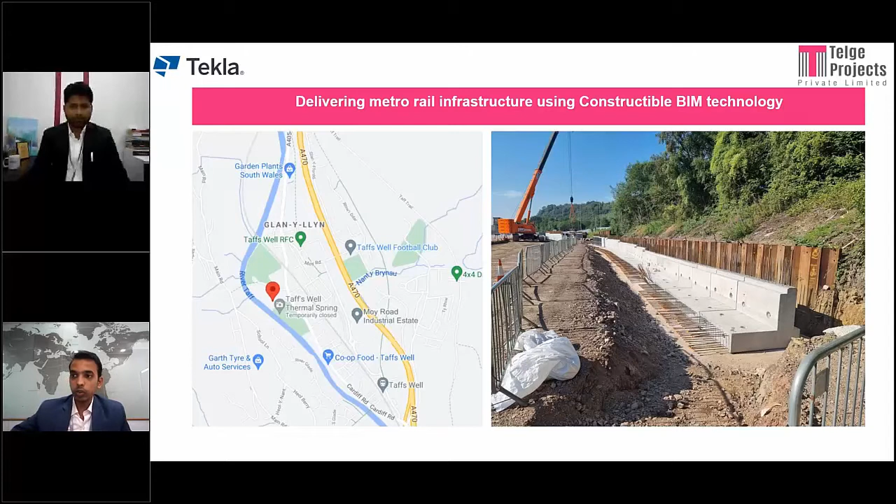Our scope for the project included more than 200 precast retaining walls, several geometric designs, and the reinforcement required for the walls. This is what made the project very unique. Now talking about the unique aspects of the project. The unique aspect of the project was the overall geometry of the structure. The overall geometry was critical as the alignment of the walls was not straight and had angulations at multiple locations. Each retaining wall had male and female joints, both at the base and at the stem slab.

Along with the geometry, the reinforcement design was also very critical as the geometry of the structure was not homogeneous. Speaking of challenges, every wall needed utmost precision to erect on site and thus had to be detailed with an accuracy of almost 99%. Every wall was complex to model and detail, along with the scale of the project being very large. It would have been a very tedious and time-consuming task to draft production and cast unit drawings for each wall with great accuracy and uniformity. This is where Tekla Structures and we come into the picture.

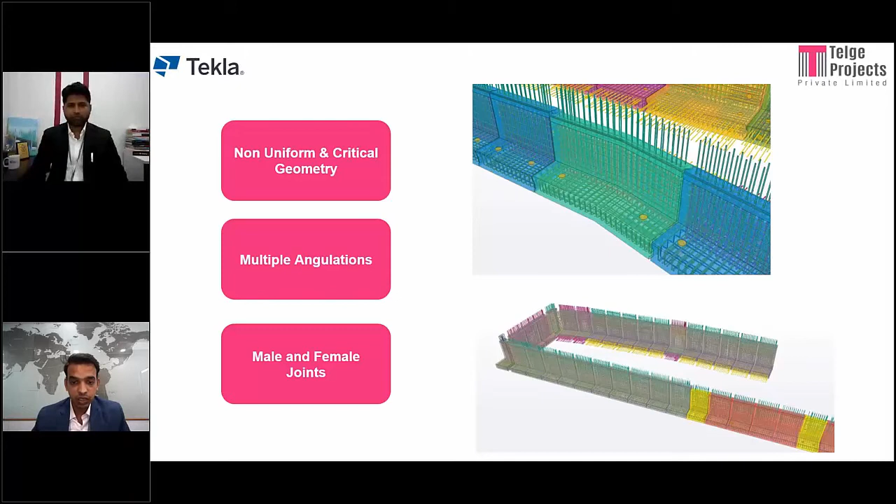We adopted a very different approach within the project, which is the primary reason for choosing Tekla to deliver as per the client's requirement. If we look around the ongoing projects nowadays, we would understand the major requirement of every project is the reduction in time and money. And similar were the requirements of the client for which they opted for Tekla Structures. It was the time restriction and high precision requirements to avoid any wastage in the yard and also on the site. The project had a limited turnaround time and, considering the geometry and erection of walls on site along with some of the in situ structures, reducing the wastage of both concrete and steel was the primary aim of the client, for which they needed automated and accurate reports.

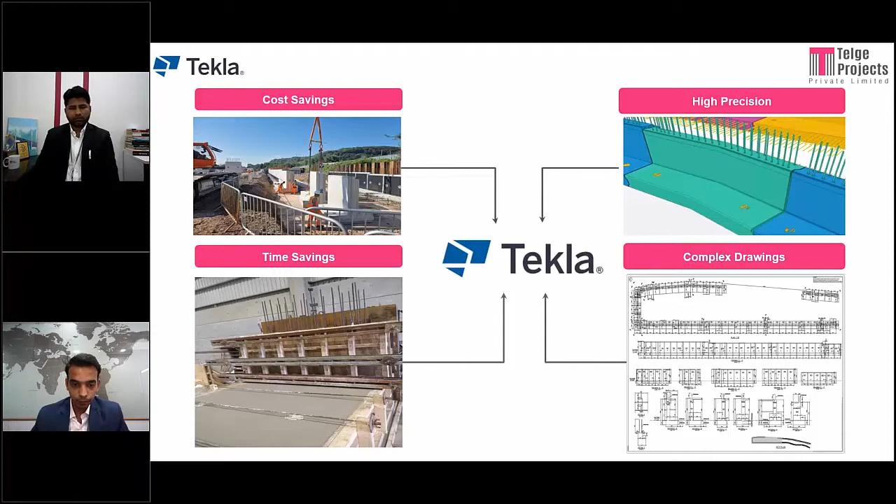Speaking about the benefits of using Tekla and the overall savings in the project. Tekla helped us derive high benefit in terms of overall savings in the project. It offers one of the best solutions to create the 3D BIM model from scratch and extract the fabrication drawings from the 3D BIM model. The major benefit of Tekla for this project was the reduction in time and money in the complete project lifecycle.

For instance, in this project, there were centrally inclined units that were designed with the help of the Tekla Structures profile catalog, more specifically the RC-RW profile. Within just 2 clicks, we were able to model the basic structure of the retaining wall. For the male and female joints, the Tekla Structures part cut command made it very comfortable for the team to provide these complicated joints. For the reinforcement, the Tekla Structures rebar set command made it hassle-free work, and the clash check option made sure that the structure had clean and clash-free reinforcement for each and every unit.

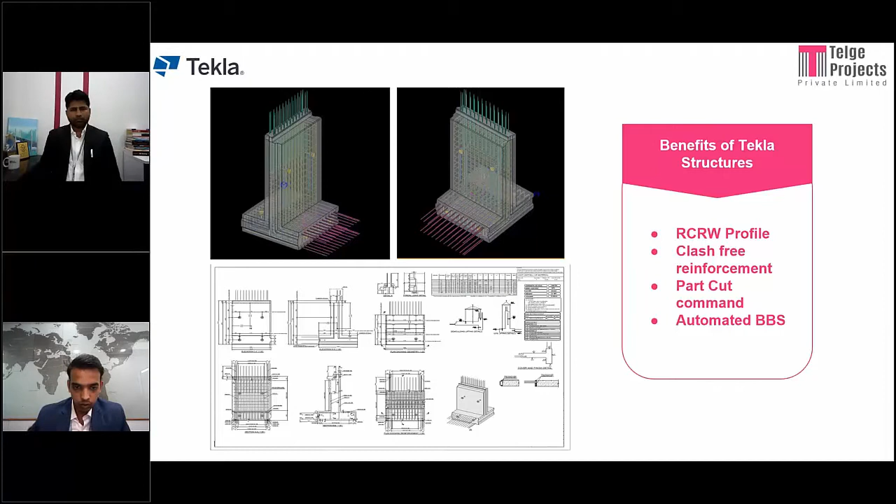Moreover, the automated generated bar bending schedule made it easier to review the details of the reinforcement in the drawings. Now talking about some stats and figures. Around 40% of the time required for the drafting of the walls was reduced due to the cloning command.

Some walls had similar geometry and also very similar reinforcement required, for which the copy to another object command was used, and the custom component command for inserts saved us around 30% of the total time required for modeling. The automated reports and bar bending schedule helped us to save around 35% of material.

I would also like to highlight that for this project, only 2 resources worked and delivered the project within just 45 days, which is one of the huge benefits of using Tekla Structures. And this was the brief introduction of the project, and now I would like to hand it over to Nilesh.

Thank you, Jayesh. So to summarize, the use of Tekla Structures for the precast project has benefited us with time and cost saving, while delivering a complex and unique project which otherwise would have impacted the pockets of the client as well as their time schedules. We are always excited to work on challenging projects of any complexity, which we have been doing and aim to continue in future.

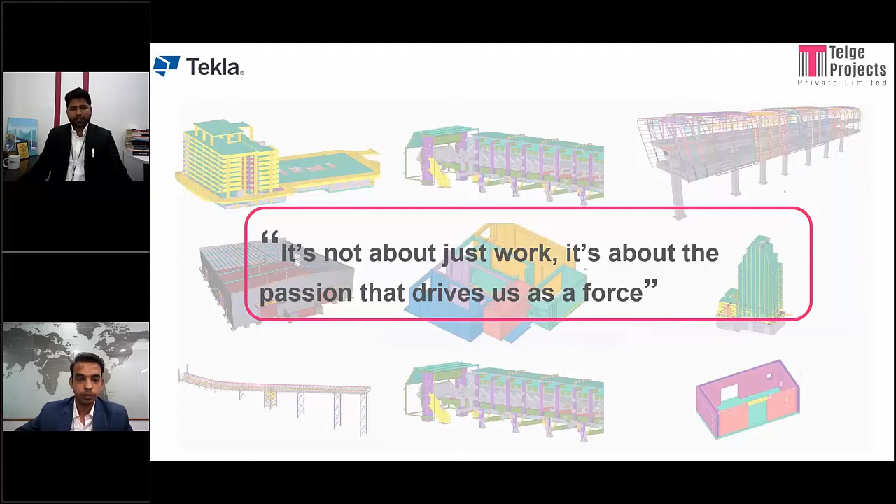That being said, Tekla Structures has been our primary and potential BIM technology partner. We look forward to delivering such amazing projects using the advanced technologies of Tekla and its unique features. To name a few, we are currently working on some prestigious projects with one of our esteemed clients, whom we call our master precaster.

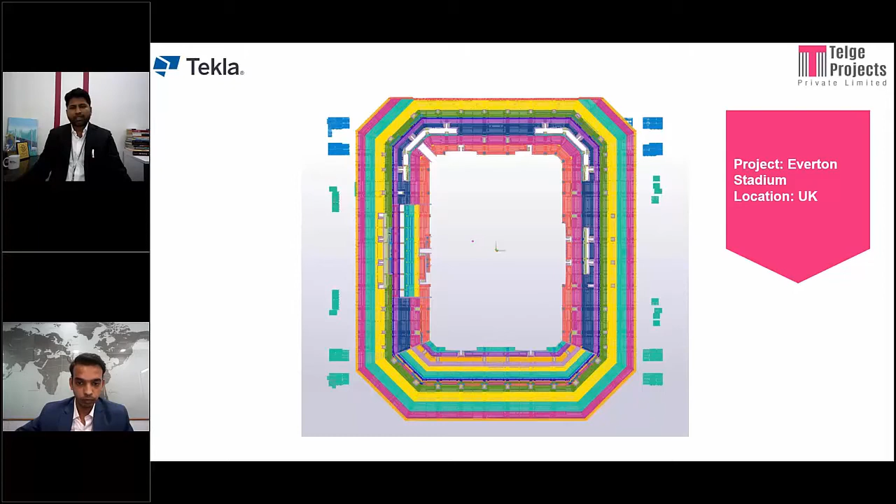The project is Everton Sports Stadium from the UK, and our scope includes different precast elements like stairs, L-shaped walls, and many more. This is a huge opportunity for our organization, and we rely on our most trusted BIM technology partner. To conclude, I would just like to add that it's not just about work, it's about the passion that drives us as a force. Thank you.

Awesome. Thank you, Nilesh. Thank you, Jayesh. That was a very good, quick, within-the-time review of the case study that we recently published. So, for the benefit of the audience, this project, as Jayesh mentioned, took 45 days to deliver with just 2 resources. There's a lot more detailed content available as a published case study on our website.

So, for anybody who needs more details on this project, we'll of course discuss it right now, but a project of this type and all the other projects that Telge Projects has delivered in the recent past, we can discuss for hours and days together. But in the interest of time, this was very concise and very to the point. I'm really surprised to see the accurate savings in terms of facts and figures that have been put forth. Not a lot of people are able to articulate it in that fashion.

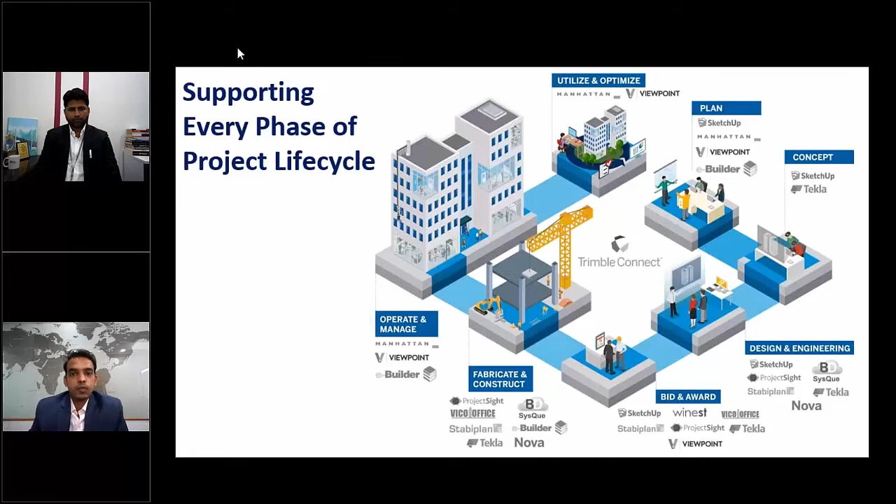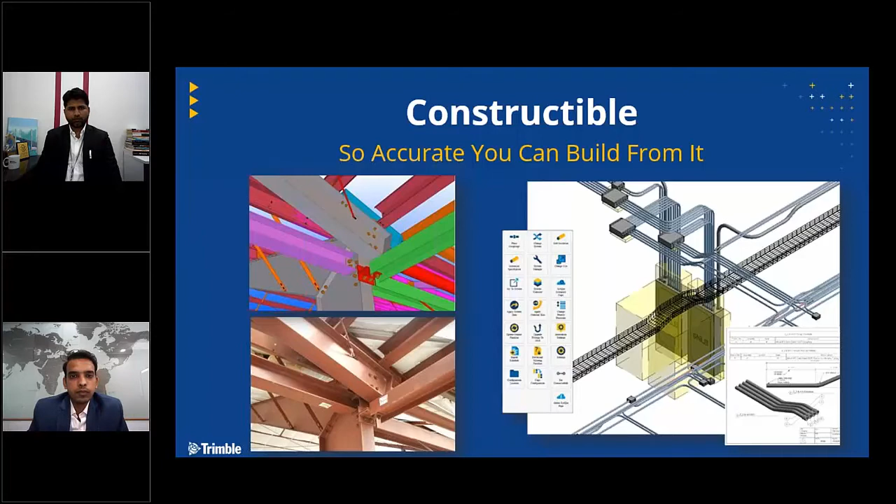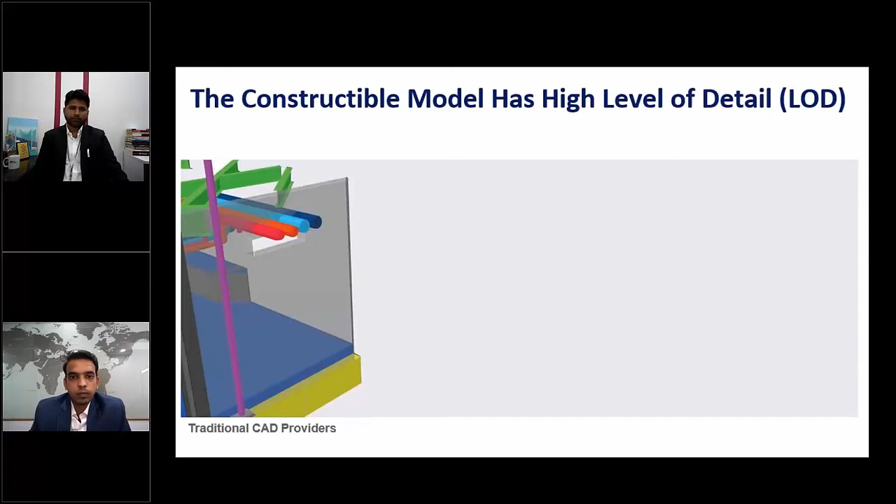Our constructible model and associated workflow are so accurate that you can build from them. In Tekla Structures, we can create a 3D constructible BIM model with high LOD, which is level of detail. Traditional design models cannot provide the level of detail required for constructability. A Tekla model can provide the highest level of detail required to ensure a fully accepted design. Detailers can create and manage the accurate detailed model using parametric intelligent tools in Tekla Structures.

Then drawings, bills of materials, and other documents and data can be generated directly from the model, reducing the need for manual work and preventing human errors. And if there is any revision, any changes in the model are automatically updated in the relevant documents, so it is easier for the detailer to keep all the documents up to date. So this is the basic overview of a constructible model built in Tekla Structures.

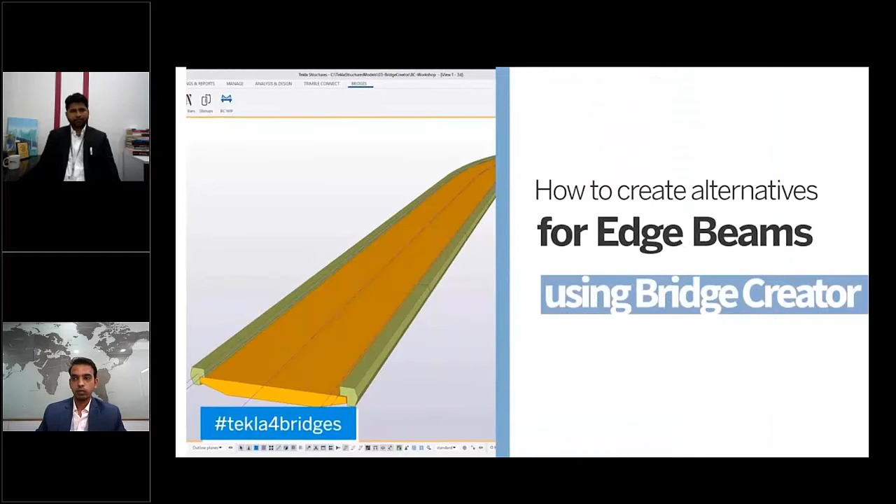So before we move on to see the precast features, I would like to show a small tool for bridges, because it shows the powerful features that we have in Tekla Structures. We have a beautiful tool, the Bridge Creator tool, with which we can create the most complex decks and edge beams with respect to the alignment file.

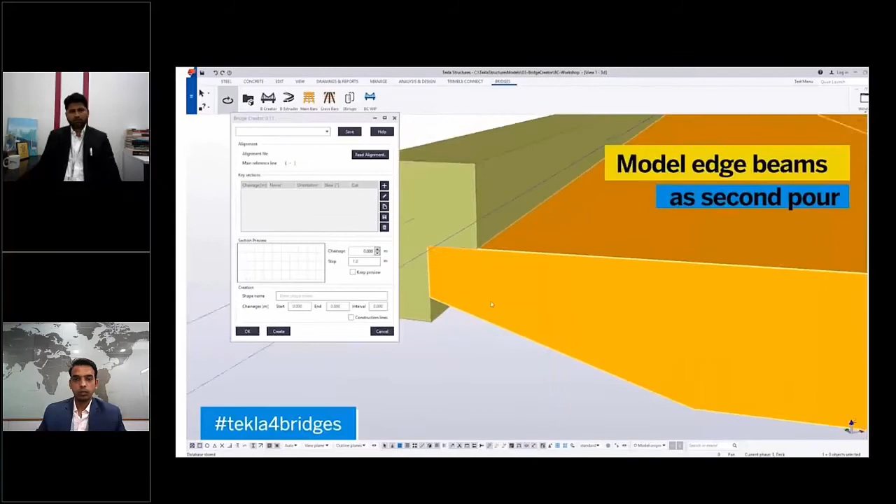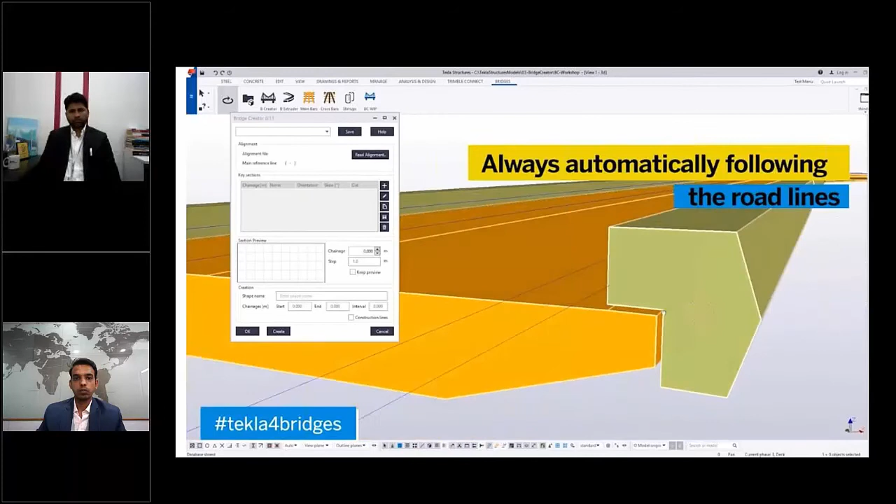The road alignment file can be imported, and we can select the cross sections available in our library, or create our own sketched cross section of a deck or girder, and enter the chainage values, and the bridges will be created along the road alignment. It can also be placed on any polyline. If you model a polyline, the model will track it and create bridges on it easily.

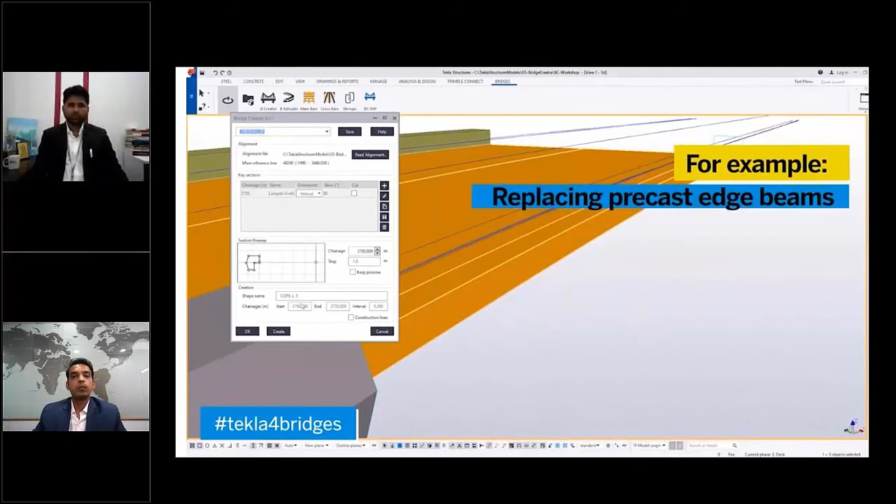These are settings that we can save and reuse for other projects. The only details that change are the alignment file, the cross section, and the chainage values. Those are the three values we enter here for the bridge to be constructed.

We also have the Beam Extruder tool where, if you have X, Y, Z coordinates and profile data in a spreadsheet, we can import it and create the bridge elements automatically. Not only the decks, piers and piles, we can also create miscellaneous items like handrails, parapet walls, and street lights using this tool. All we need to do is select the component, and it will follow the LandXML line and create them with user-defined spacing.

We also have a powerful link with Grasshopper. Grasshopper works with Rhino, and it's like a small script that has a direct link with Tekla Structures. Any modeling command in Tekla Structures is available in Grasshopper through the link. Once we add the script, it can be used in various locations as required, for example modeling a deck, foundations, piles or piers.

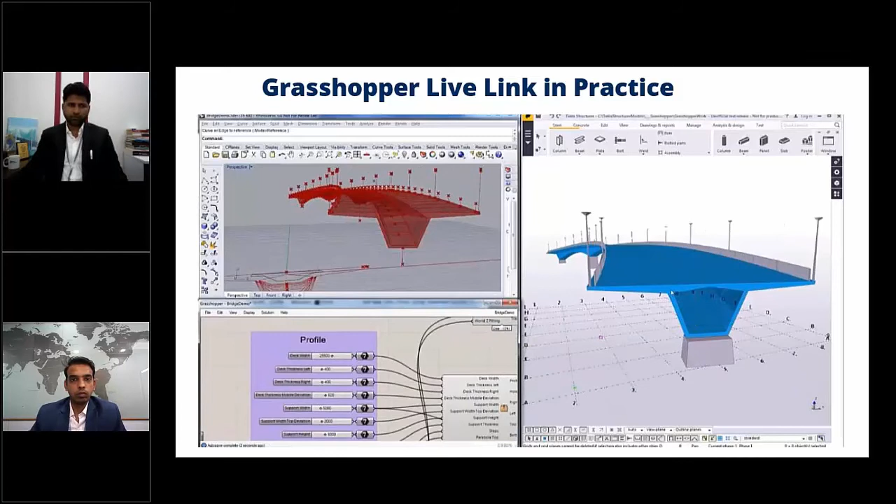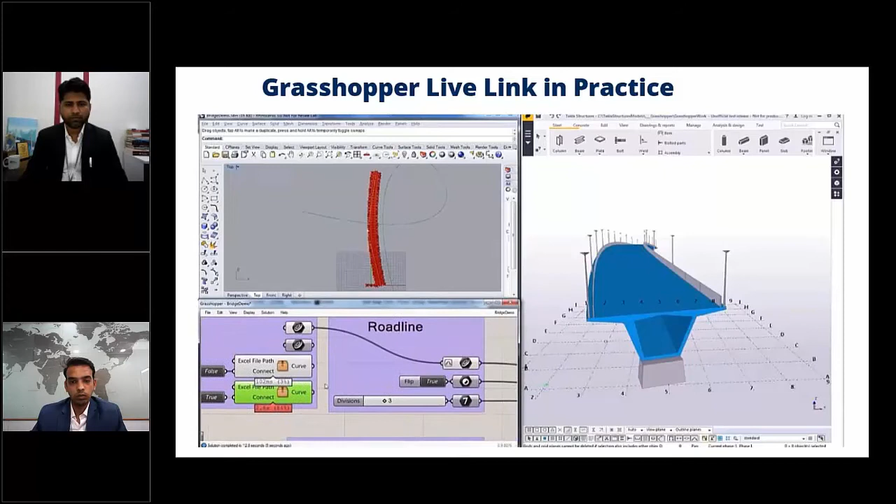It's very simple to modify. Once you modify it in Rhino, the Tekla model instantly gets updated. We can also add an Excel file with the coordinates. We drag the Excel file, and this is the Excel file line. We just need to put the input. Once the base is ready, the model gets automatically adjusted or recreated according to your line, the XML file or the spreadsheet information.

After that, making changes is also much simpler. For example, if you set the division to 7, those 7 divisions are made. These are all handy once the base script is ready. And we have a free link available with the trial license that you can try in Tekla Warehouse.

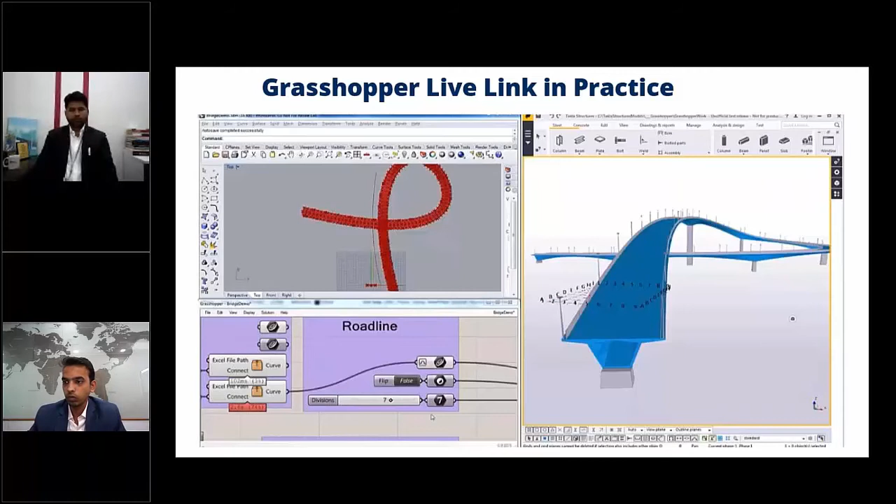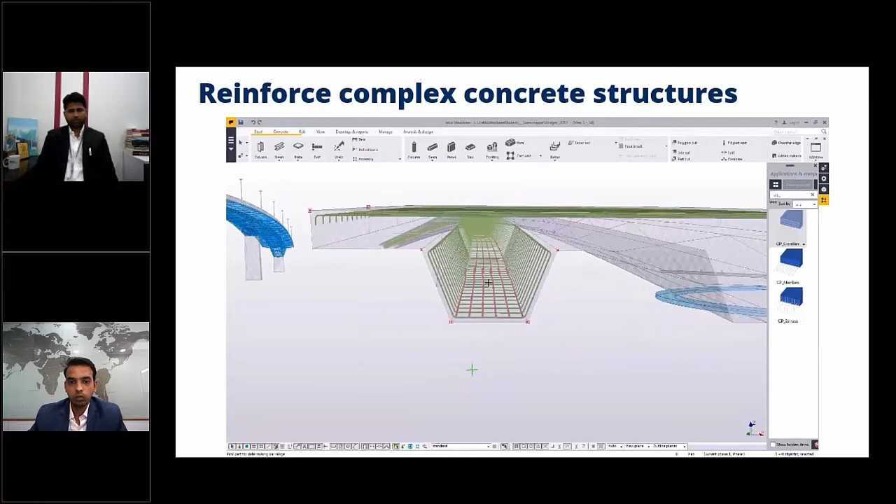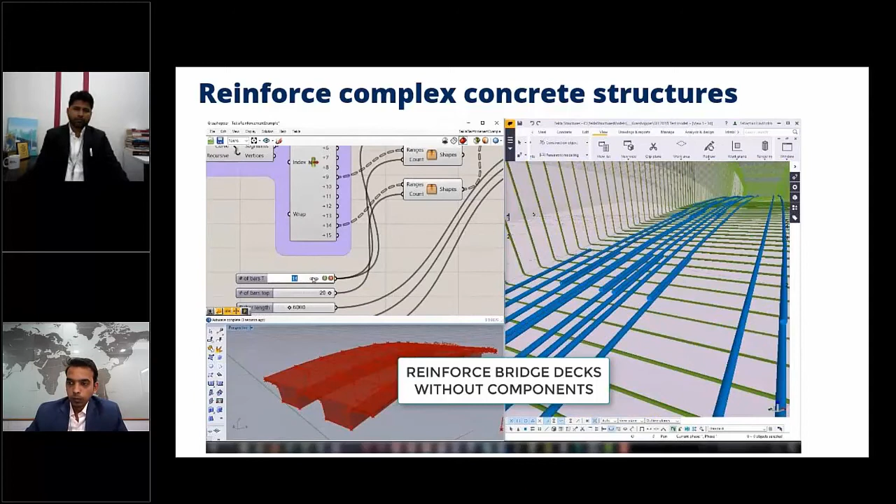So this is another tool, and we can also do the reinforcement with the Grasshopper link. The scripts for reinforcement, the tools, the buttons are available ready-made in Grasshopper link. Once you download the Grasshopper link from Tekla Warehouse, all the command buttons are available on top, and you can drag and drop and create the script.

And all these reinforcements are adaptive to the changes in the geometry, because in this script we are just adding the reinforcement with respect to the cross section. You can see here this is a complex shape, and here we are reading the cross section. With respect to the cross section, the reinforcement will be given. We just need to select the diameter and the spacing.

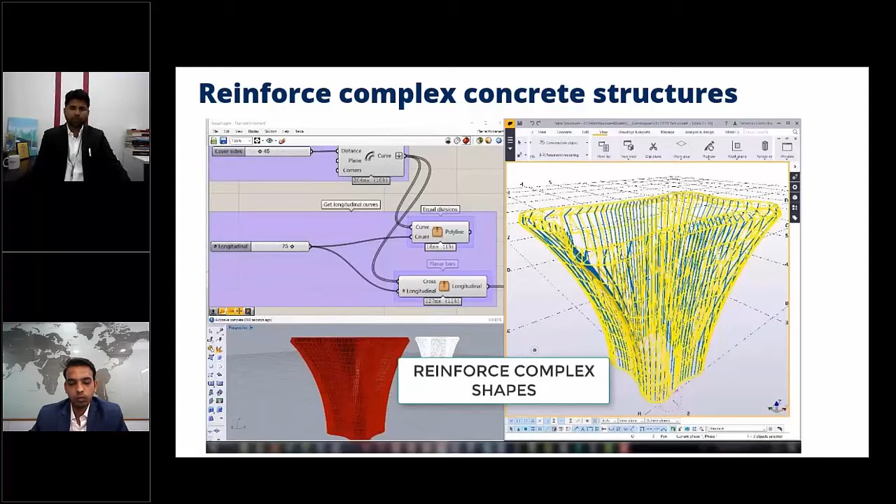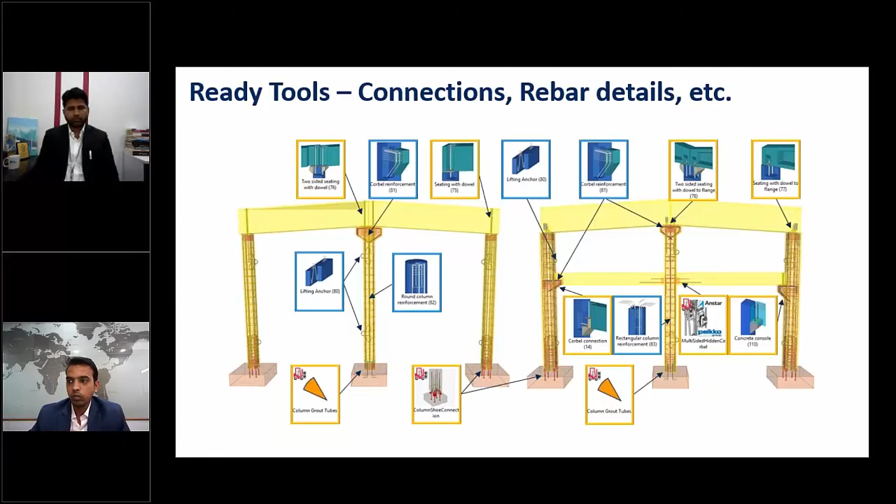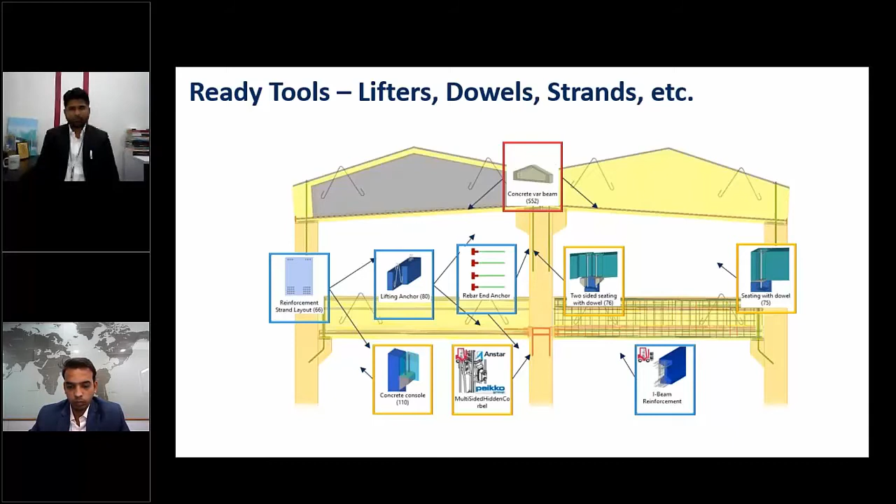Coming to precast, we have a lot of tools available for automatic connections and rebar details: rectangular column reinforcement, circular column reinforcement, different types of corbels and corbel reinforcement, grouting connections, etc. Here is an example of lifters, dowels, strands, and I-beam reinforcements. These are all automatic components that come with the software installation. Apart from this, you can download various tools and automated connections from Tekla Warehouse as per your needs.

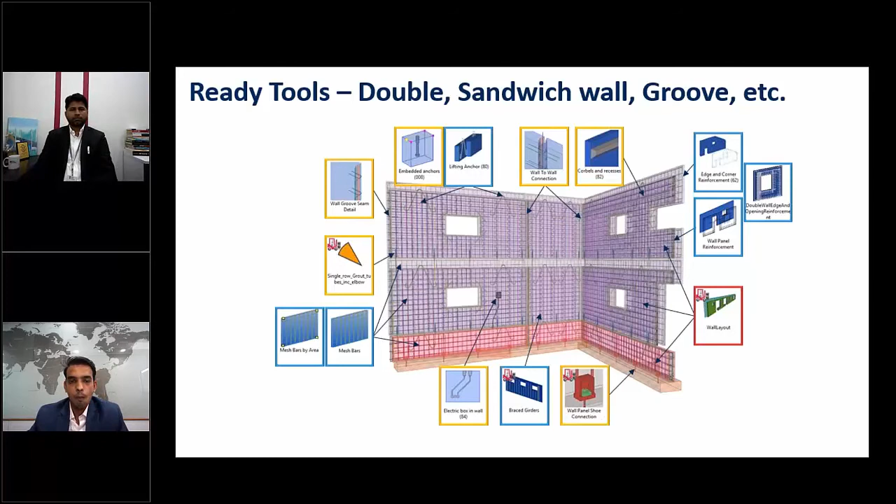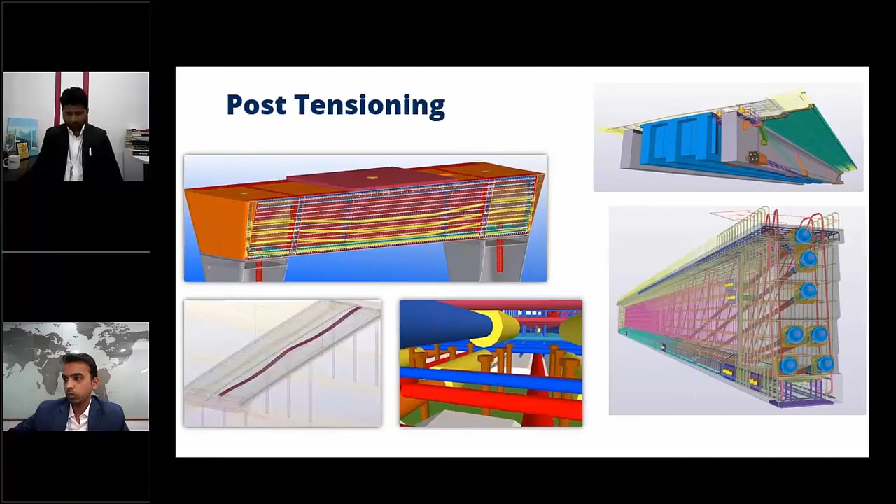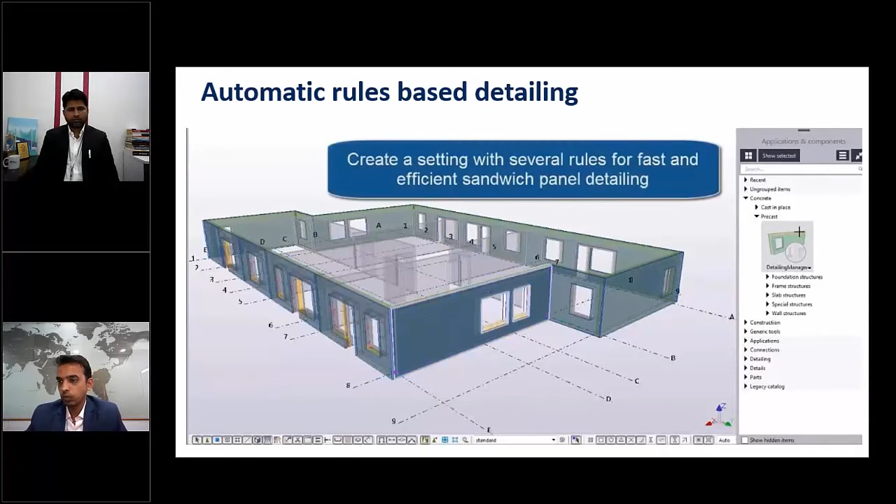All these components are intelligent. For example, when we increase the wall size or wall weight, the number of lifters will automatically increase based on the conditions. When we add an opening, the weight of the wall is reduced and the lifting diameter is automatically reduced, as you see. So all the components we have are intelligent and adaptive to the changes, so revision is much easier.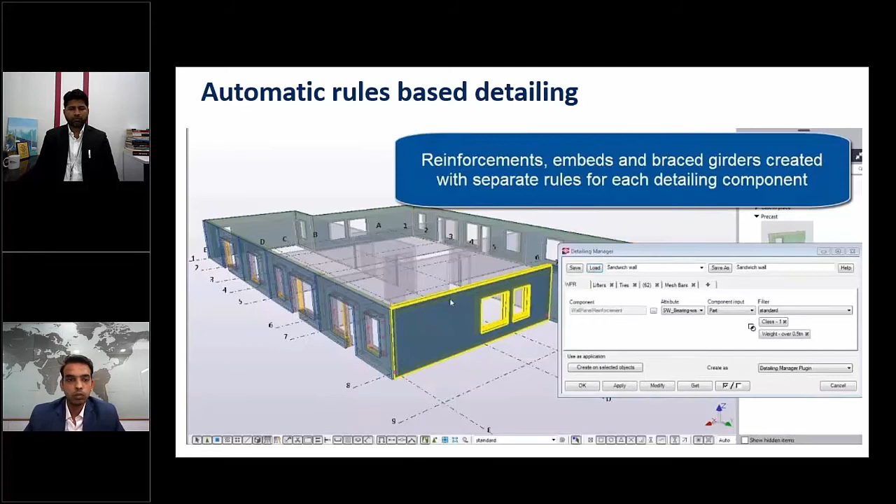Also for precast, we have the batch editing tool where similar assemblies or similar cast units can be modified on a mass basis. Once you modify any one particular wall element, we can apply those changes to all similar elements automatically by selecting them from the list.

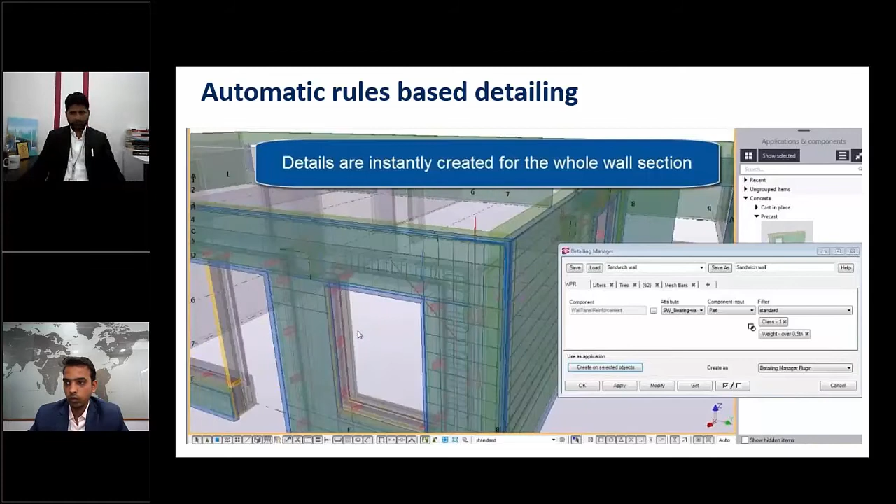See here, at the click of a button, how many details are placed inside. Not only the reinforcement on each face, but the additional reinforcement and lifting bars are all placed. As I said, these are all adaptive to the changes. Once we add a new opening or adjust the opening, your reinforcement detail is going to get updated.

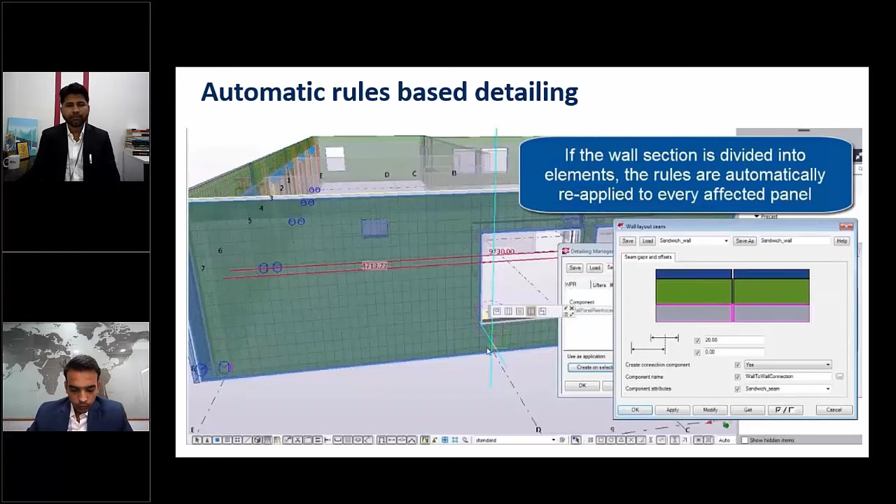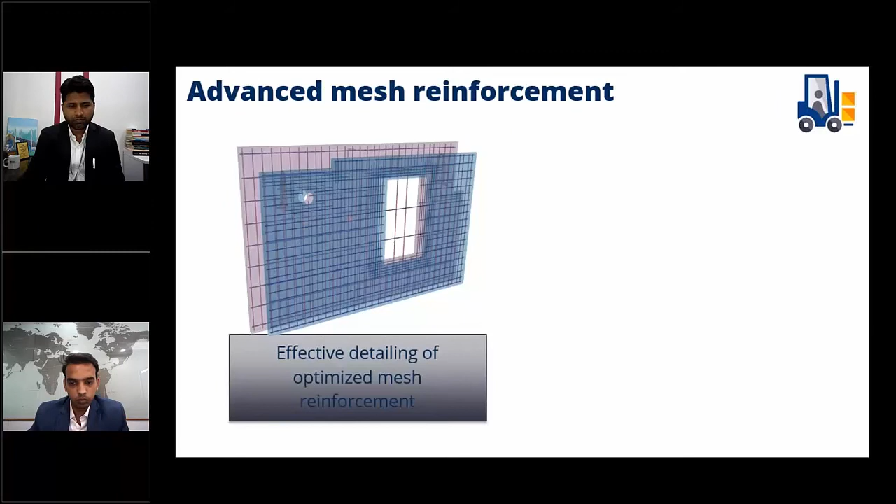We have many tools for floors, sandwich walls, hollow core slabs, and spacer tools for different purposes: for raft foundations, thermal pins, sandwich diagonals, and frames. These are a lot of automated tools that we have in Tekla Warehouse. For the benefit of time, I'll just show you a couple more tools, and then I can move ahead with our presentation.

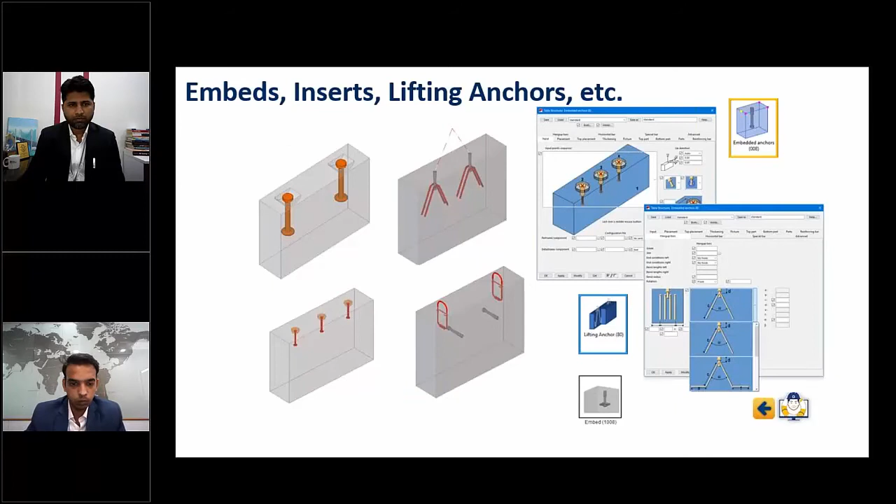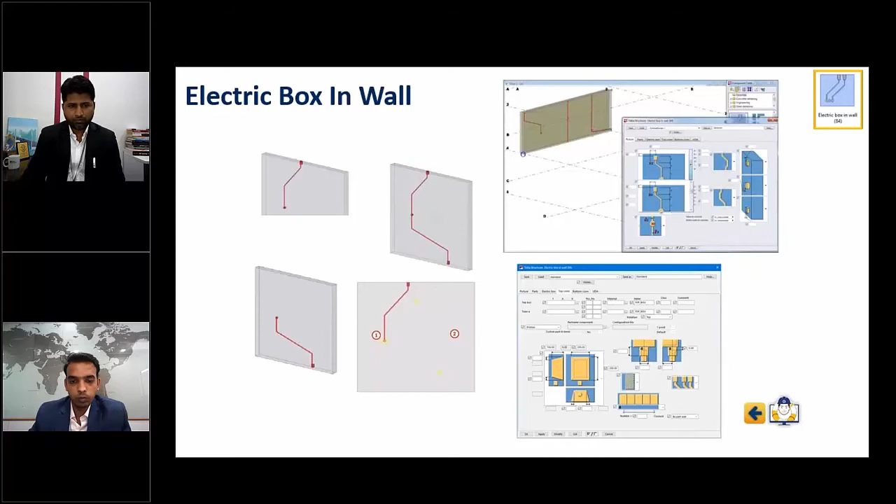These are some examples of embeds, inserts, lifting anchors. We can place all these intelligently inside the wall elements or slab elements, and we can generate the drawings from them.

And yes, we have automated clash check. We can detect anything inside Tekla Structures: reference model versus parts, part versus part clashes, part versus reference object clashes, component versus component, rebar versus precast, and other precast miscellaneous items like embeds. We can run the clash check automatically and detect it, the checker can assign it to the detailer, and we can keep track of the history, like which clashes have been removed.

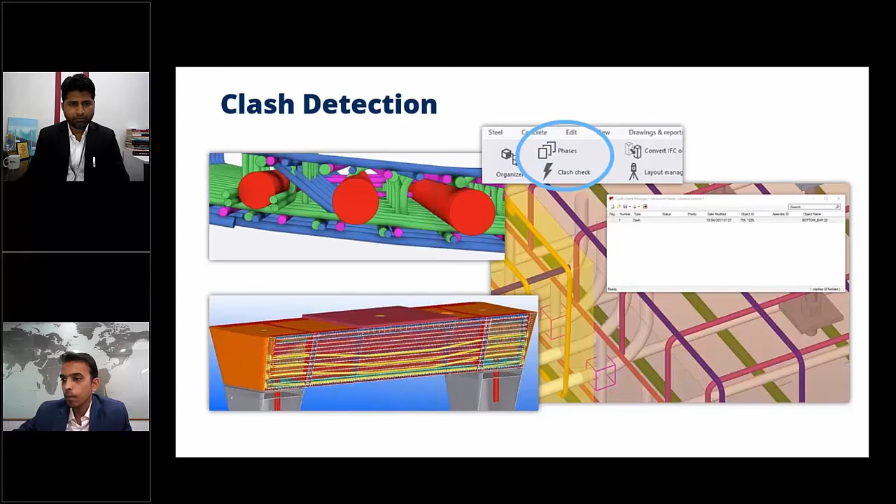Someone asked about the cost quantity calculation. The design to cost tool makes value engineering significantly faster to find the most economical solution for your precast project, working directly in the Tekla modeling environment. We can instantly check the cost and compare it while we change the element geometry or hollow core slab direction. We can instantly know the cost for tendering or bidding purposes.

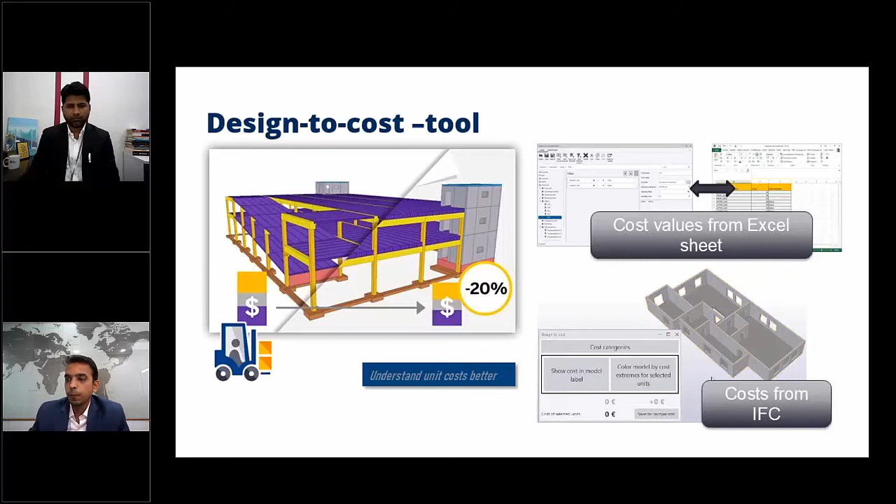Once you model the preliminary objects, at any point of time I can detect the cost. We have a predefined cost schedule for each and every object, which we can modify, and we can calculate the cost at any point of time. Obviously we can take the material takeoff also, and reports for reinforcement, different types of bar bending schedules with pull-out pictures, formwork details, concrete quantities, cladding surface finishes, etc.

And from 2D to 5D and 4D estimation, everything can be done in Tekla Structures. Here is how it can be done. Some examples of bar bending schedule and concrete takeoff. We can create for the whole project or for the selected objects or for a particular floor at any given time. I can quickly select and I can create the quantity takeoffs.

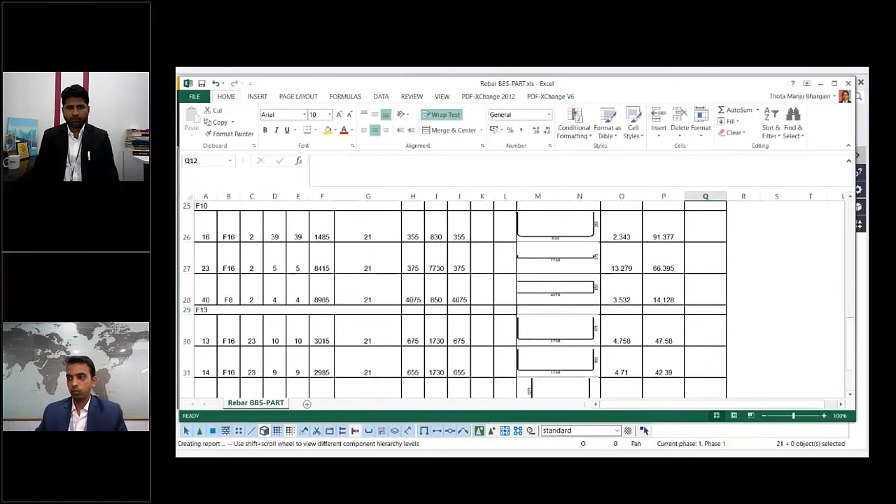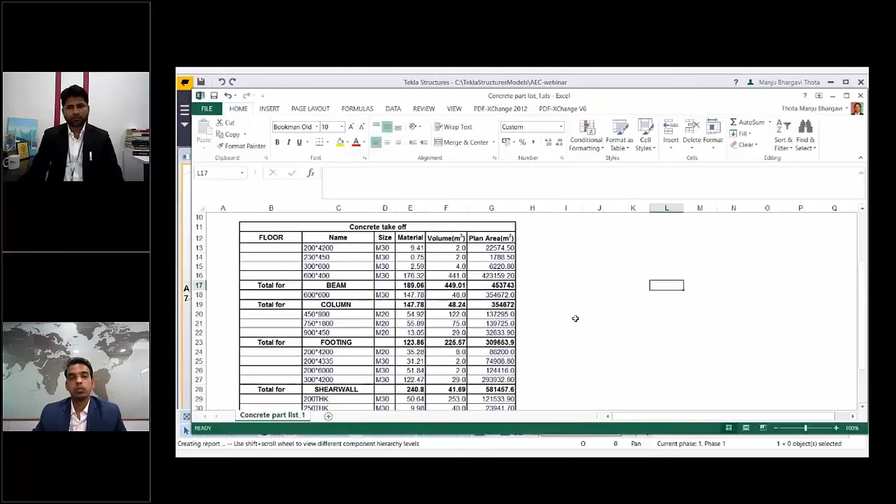Here is a concrete takeoff for each element wise, and these are all customizable for your own standards. The content, the logos, the font, everything can be customizable to your own requirement as per your client needs. Here is an excavation report in cubic meters for concrete below ground level and concrete above ground level for different elements.

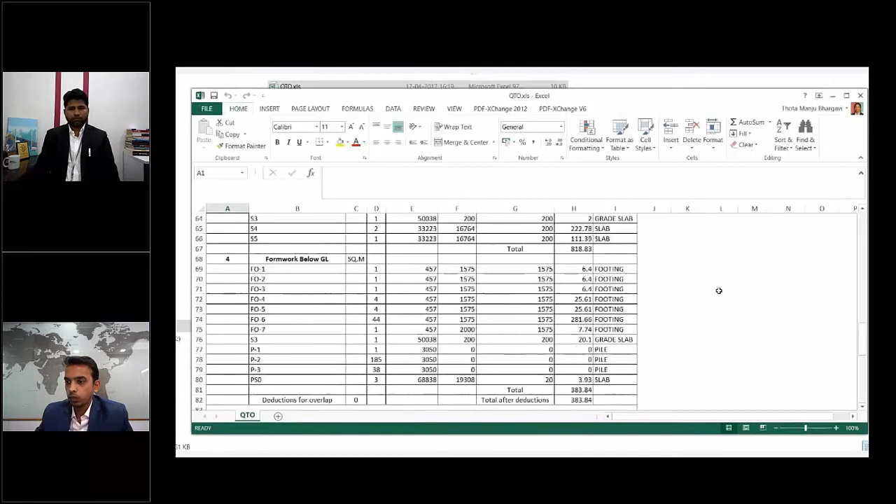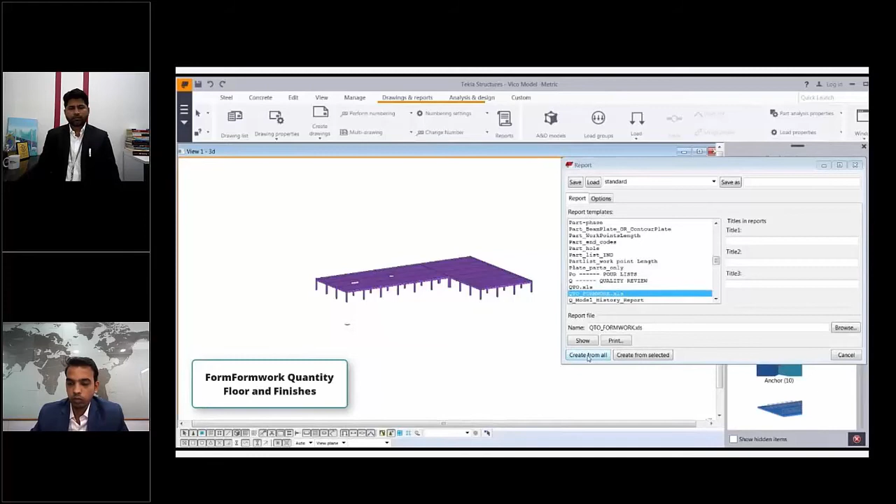So once the model is ready, we can quickly calculate the formwork quantity, also floors and finishes data we can create. So we have our automatic tools for calculating the formwork quantities without any overlap. When the column beam junction is there, it will not calculate. It is intelligent enough to avoid those overlapping portions while calculating the formwork quantities.

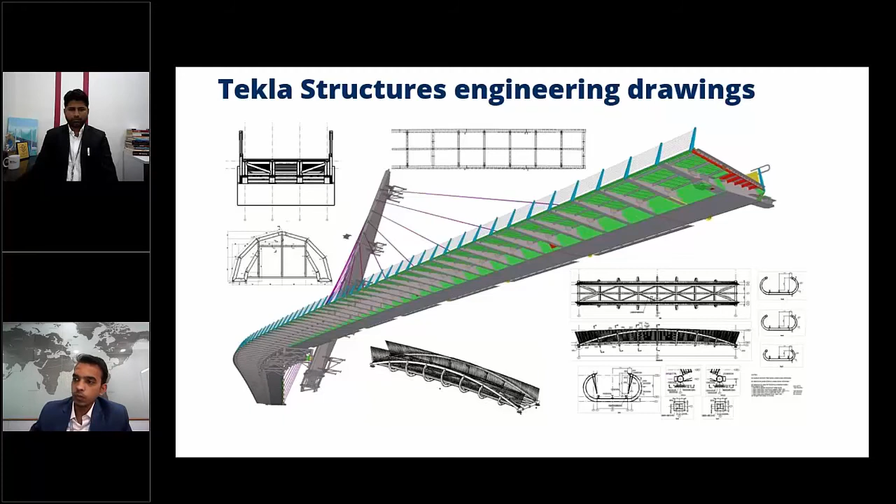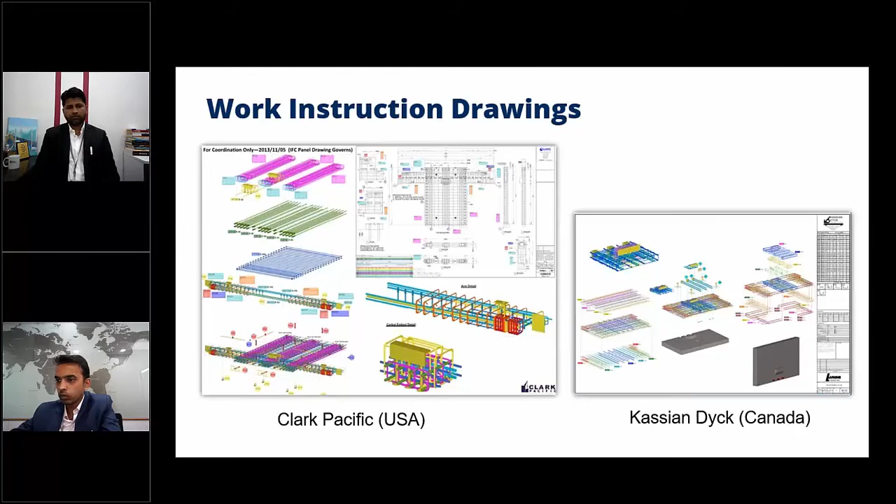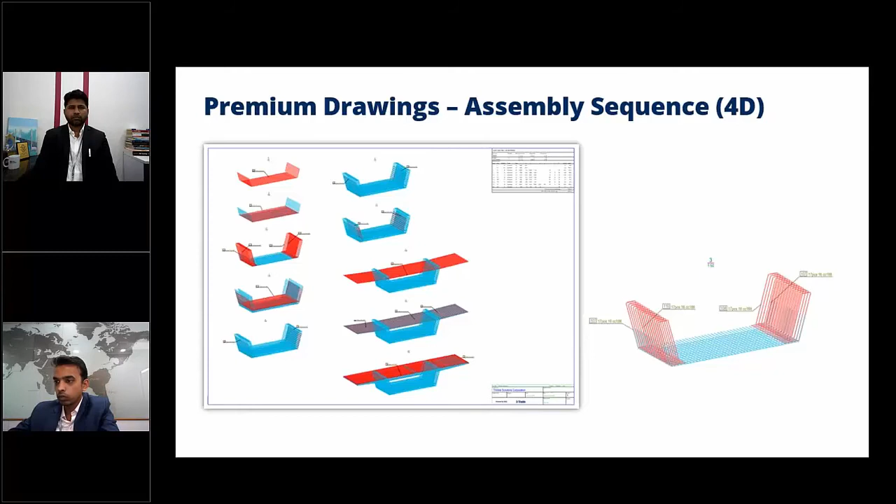So some sample output drawings generated from Tekla Structures: engineering drawings for steel bridges and concrete bridges, and the workshop drawing and work instruction drawing. It's from our clients, Clark Pacific and Kassian Dyck. And also we have the assembly sequence drawing for reinforcement, which reinforcement to be assembled first and second, with different color coding. These drawings can be created accordingly. The 4D sequential drawings.

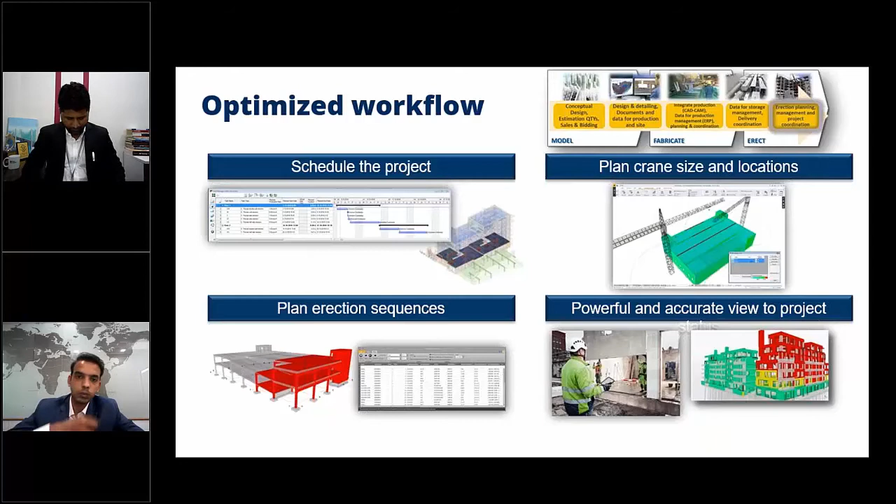And also we have tools for optimized workflow. We can schedule the project. We have a task manager to calculate the task accurately from the 3D data model that we have created. And we can also plan our erection sequence. We can plan the crane size and location. And also we can have the powerful and accurate view of project status. 4D scheduling. According to the timeline, we can check the status of the project with different color coding at any given point of time. So what's happening at the site, we can see it virtually.

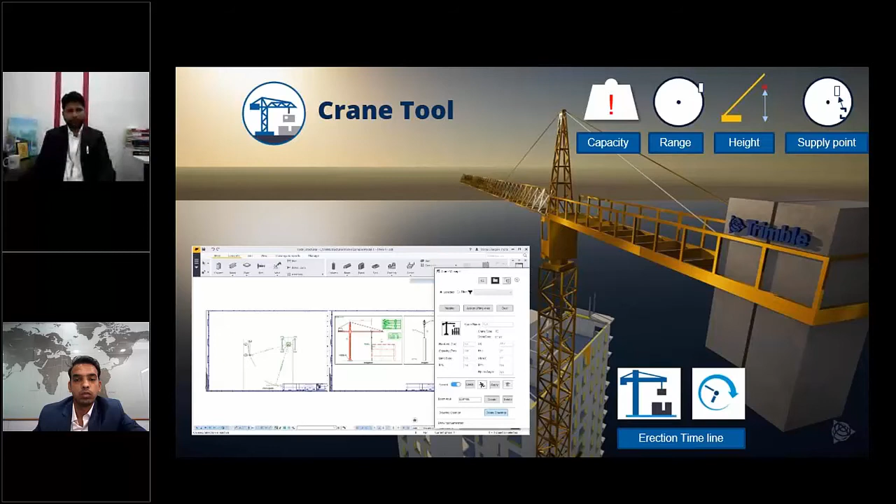This crane tool, like I said, helps you to optimize the needed crane size and locations, or create your prefabricated design in a way that it's suitable for the selected cranes. This tool has many different lifting checks, support for customized cranes, lift simulation is also available, erection time calculation embedded, and also the drawings. In the end, I can give a proper and accurate drawing where to place the crane for which element to lift. So from start to end, we can streamline the process of erection with accuracy, and we can avoid a lot of inconsistencies or uncertainties in the site.

And accurate fabrication data is absolutely crucial. So supporting the digital fabrication with different solutions that we have, Unitechnik, Progress XML, Elematic, these are all the NC softwares. From the Tekla model, we can export our model data to the NC machine for automatic cutting and bending, and for automatic process for precast elements and reinforcements.

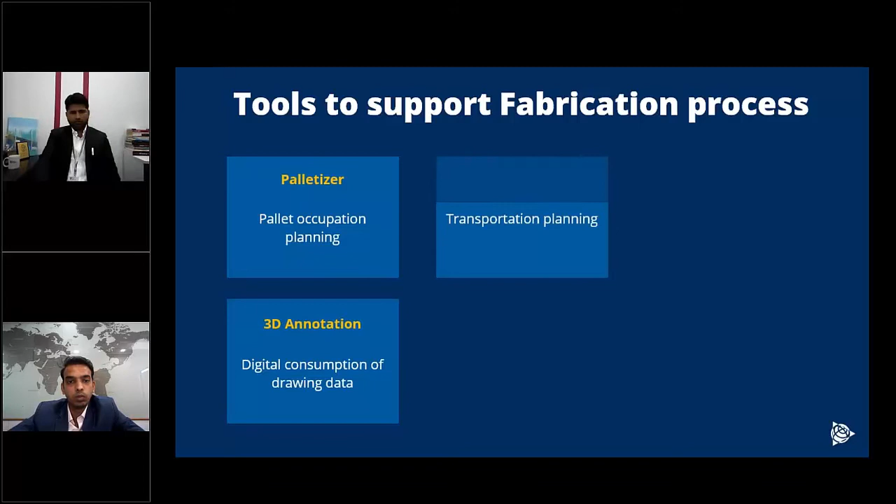And we have also tools that could support you for transportation and erection. Palletizer to optimize your pallet size, pallet placings. From the 3D model, I can plan the pallets, what are the slabs or the wall panels that I need to place in a pallet in the most utilized manner. And 3D annotations are available that I will show you in coming slides.

Stacker for transporting the elements in the truck. I can stack it in a 3D way. I can just move it with 3D animation. I can just drag and drop the different wall panels inside the truck, and I can see which is fitting more, which is more feasible, which is more efficient for me to transport in a single load.

And rebar nesting for optimized cutting. We can do the nesting, and we can do the optimization of reinforcement using this rebar nesting tool. And a scaffolding tool is available. We can build scaffolding very quickly using the scaffolding tool. And much more are available.

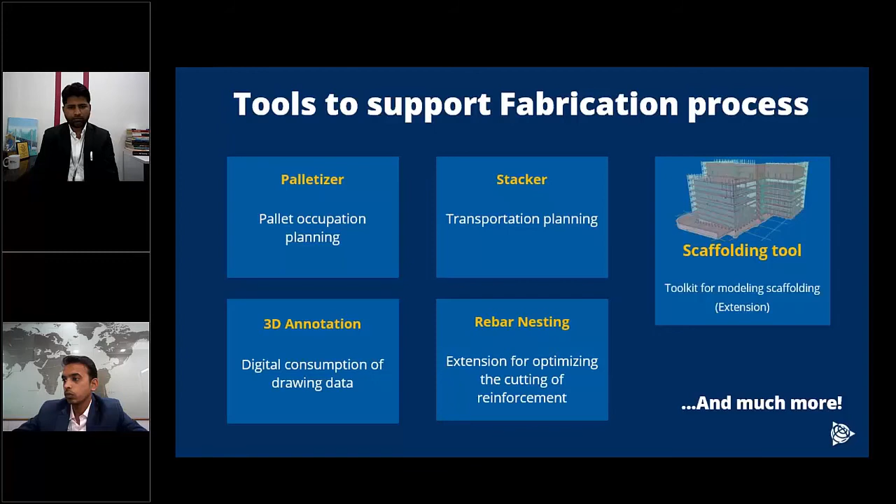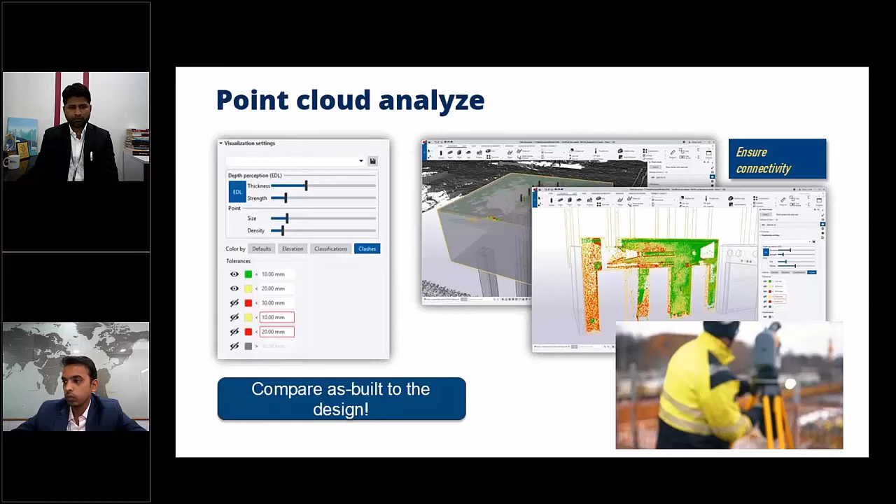And coming to the last portion of our session, let's discuss some more added features or value addition to our software. We can run the point cloud analysis. We can compare as-built to the design. We have the Trimble 3D laser scanning machine, which will scan your model and we can get it superimposed on the Tekla model.

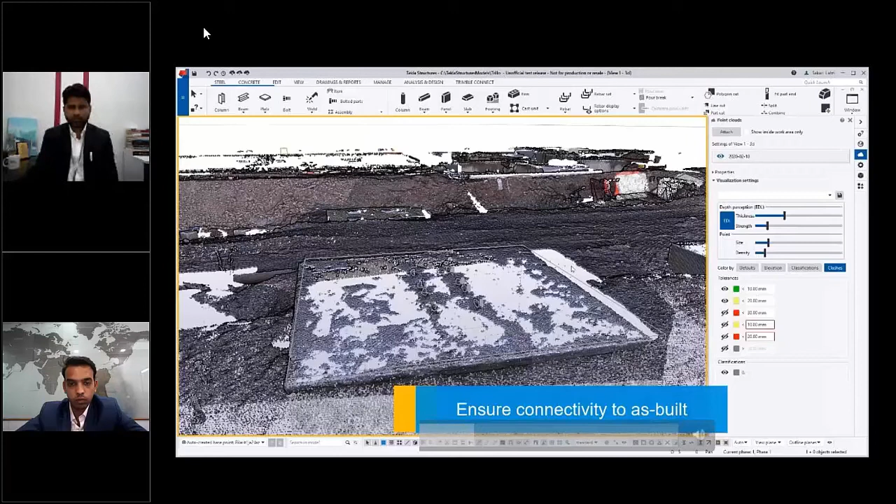And we can ensure better connectivity between the model and the as-built data. Mr. Jayes has said correctly, the importance of as-built data, how it is crucial to ensure the accuracy of the project, and you can do it automatically in Tekla Structures. Once you scan it, I can superimpose and we can ensure the connectivity to the as-built.

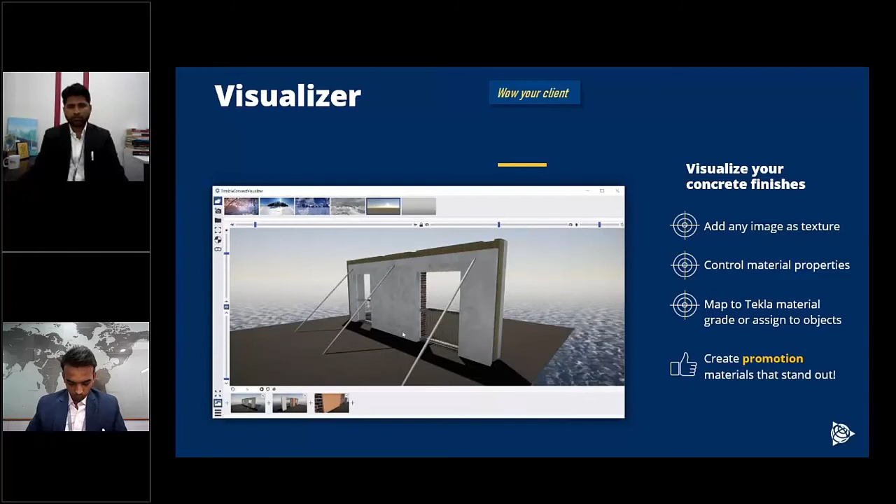And with Trimble Connect Visualizer, you can create a photorealistic rendering from Tekla Structures models. Now it has a feature for material definition where you can create custom texture from image files and control the material properties. It can be mapped easily to Tekla material grade. So now we can create a powerful promotion material about your precast project with the concrete finishes that you're able to manufacture really. That is much more powerful to wow your client.

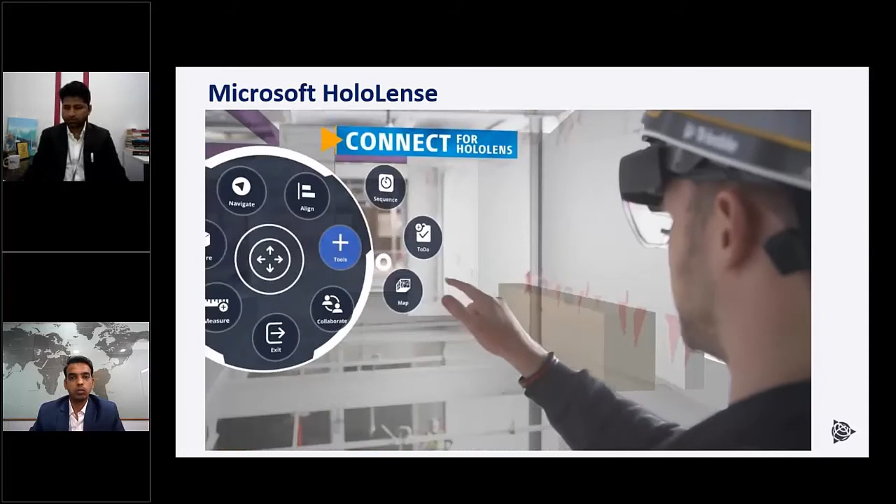And also it has a new virtual reality mode. When we talk about virtual reality, we have a tool called Microsoft HoloLens. This is a wearable and self-contained computer, the XR10, and it contains Windows 10 inside. So then imagine how powerful it is. Its sensors understand the environment and support interaction between the digital content, that is the model, and the physical environment, that is the site.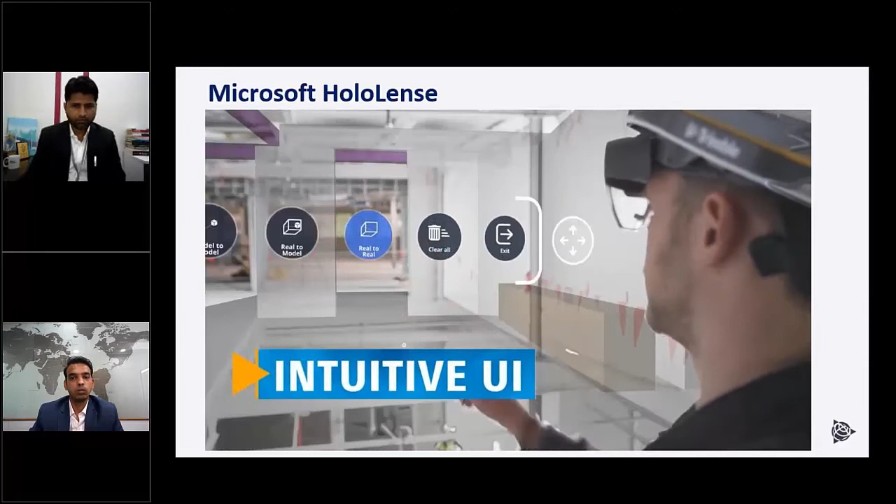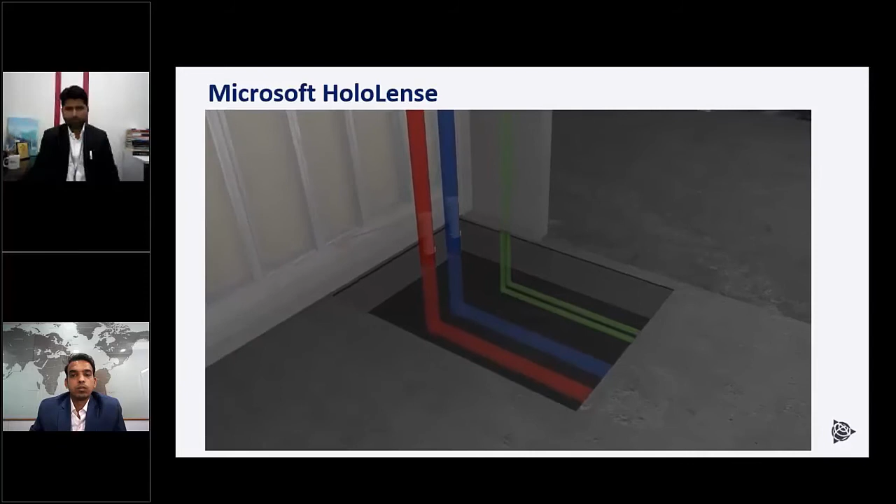You can place the model on the site actually, and then you can see what is happening and where the issue is. The see-through display is there to visualize the content, and I can still be aware of the surroundings. There are a lot of safety features added to this, even the noise cancellation. We should be aware of what is happening in the site, right? You cannot avoid the environment in the site because it should be taken into account for the safety measures in the site. So all those things are taken into account with the norms, government guidelines, and we have this XR10.

From Trimble Connect Visualizer, I can bring the model and I can superimpose it on the actual site, and I can see the model in virtual reality with the actual size and the information inside it.

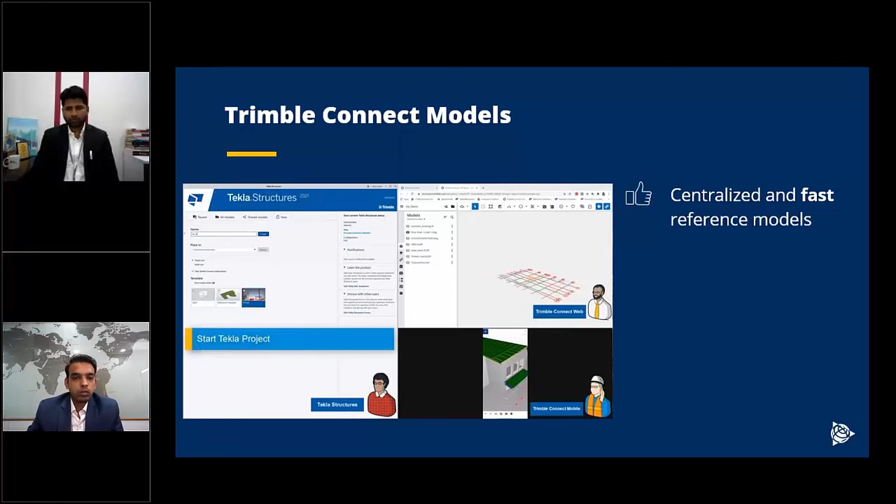And we have Trimble Connect to support the constructible process. Data must be connected for activities such as procurement, estimating, machine automation, and asset performance. Using Trimble Connect to host the project models gives you a great benefit to your projects. Models in Trimble Connect are a centralized and fast way of handling models. A Tekla model can be easily shared to Trimble Connect as a .tekla format, and Trimble Connect stores a history of models. We can bring in architectural model, structural model, MEP model. So it's very powerful to keep track of the changes happening in the project at any given point of time. Any different stakeholder can know what is happening in my project.

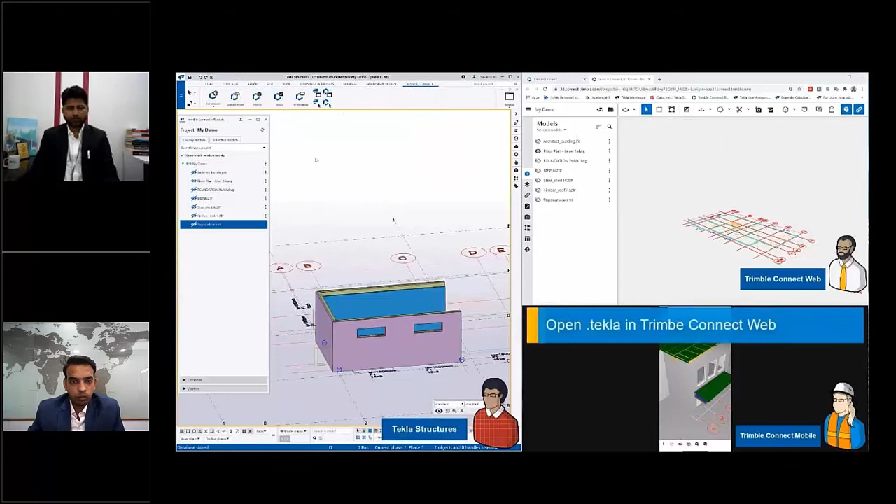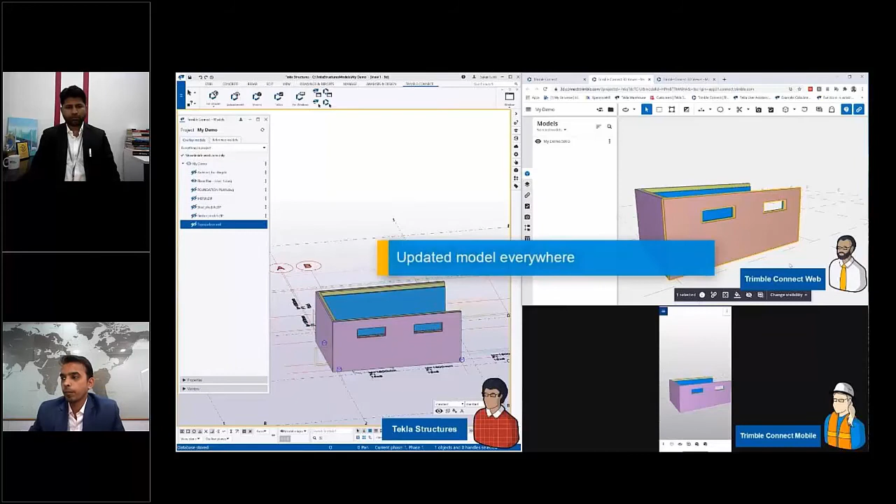So here is an example. We're just modeling some wall panels using the DWG file inside it, tracing on top of it for quickly constructing it, and pushing the model to Trimble Connect. On the right hand side, what you see is the Trimble Connect web app at the top and the mobile app at the bottom. In all these locations, different stakeholders who do not have a Tekla license can access the model. He can view it. He can do the markup. He can run the clash check. He can superimpose the architectural model or MEP model in the mobile or in the browser, or using the desktop app. He can have the entire detail. He knows what is happening. He can assign some tasks to a particular group of the team, and he can basically manage the entire project in his hand.

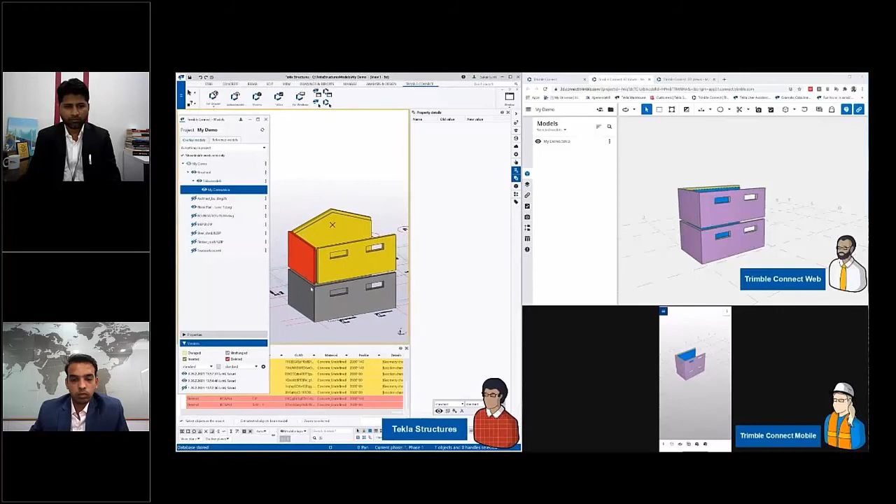I can also compare different versions: yesterday how my model was, today how it is, and also the 4D scheduling. These are the different changes. Some element has been modified. He will get the push notification instantly if anything changes. He can open the app and he can view the history, what is happening, and he can manage the team.

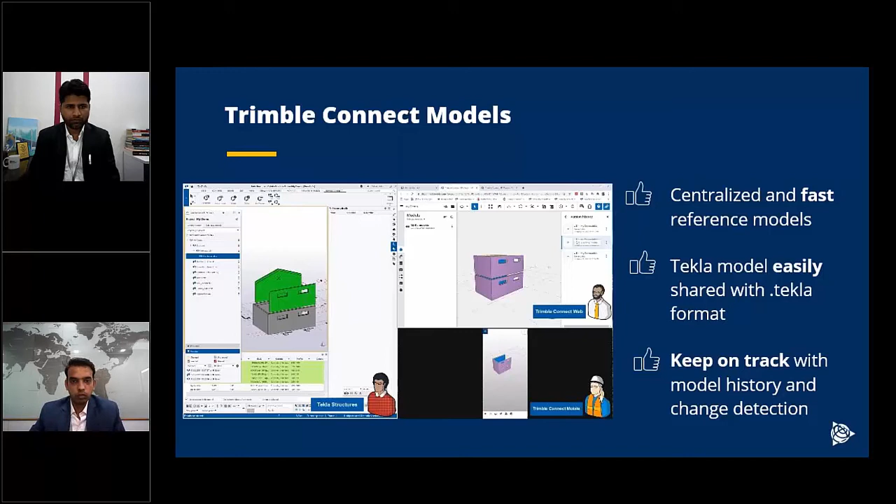As I said, we can do the clash checks. We can also attach the documents. The 2D drawings, PDF file or DWG file, can be attached to it. And added to it, we are introducing a new latest feature in Trimble Connect that we can do drafting work also. A proper drafting feature is also available. So that comes with the disclaimer. We will let you know once it is released.

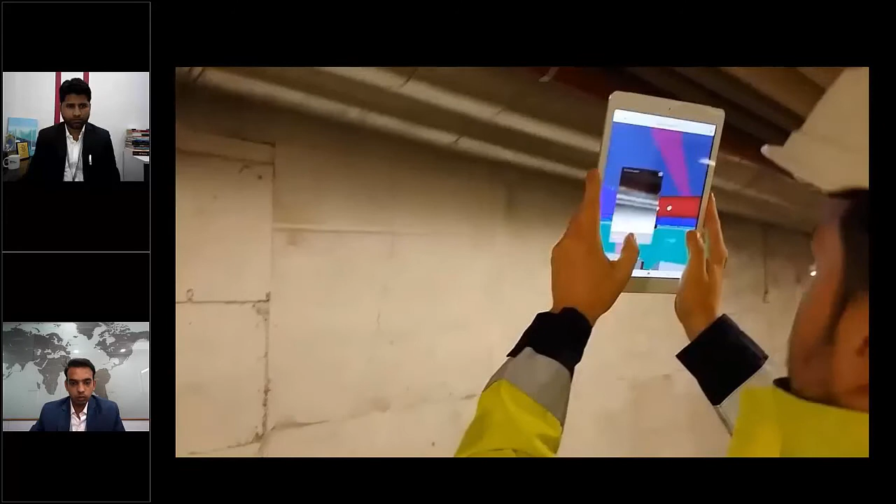All right. So again, this is the one. And one more example here, the mobility. A person in the site opens Trimble Connect on his tab and he attaches a particular issue that he is facing in the site. He can attach it to the particular object, a Tekla column or Tekla beam, and the detailer will get a push notification and he can see what is happening in the site. All these things are digitally transferred, and the RFIs, everything can be stored and the history can be tracked at any given time.

And while drawing can contain the most complete information, it always requires the right understanding, right? So we have this feature introduced in Trimble Connect where we can superimpose the drawing and merge it with the 3D object. Combining 2D and 3D will result in easier, faster, and better understanding overall, right? And do not forget the opportunity to work more efficiently.

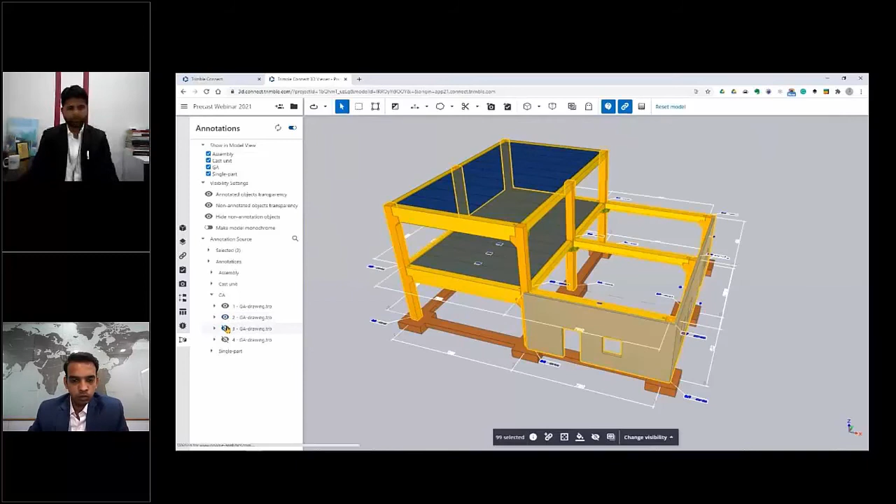The 3D model speaks more than 1,000 words. It makes it easier to understand complex circumstances. The 2D, again, gives more insight for checking and reduces a lot of time to check the models easily. It's GA drawings which are superimposed, and detailed annotations can also be placed for reinforcement details.

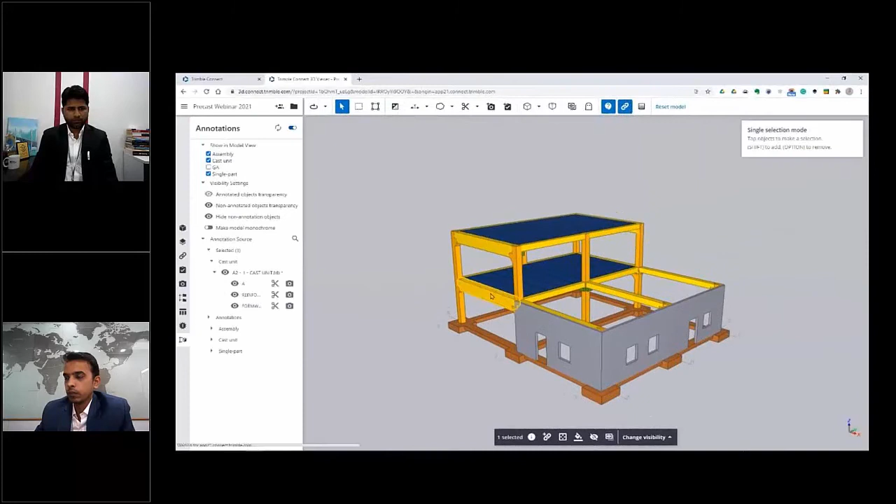So if you see here, just imagine a site engineer carrying this in his hand while the execution is going on. How powerful it will be, how accurately we can build the model. This is the power of the constructible model in Tekla Structures.

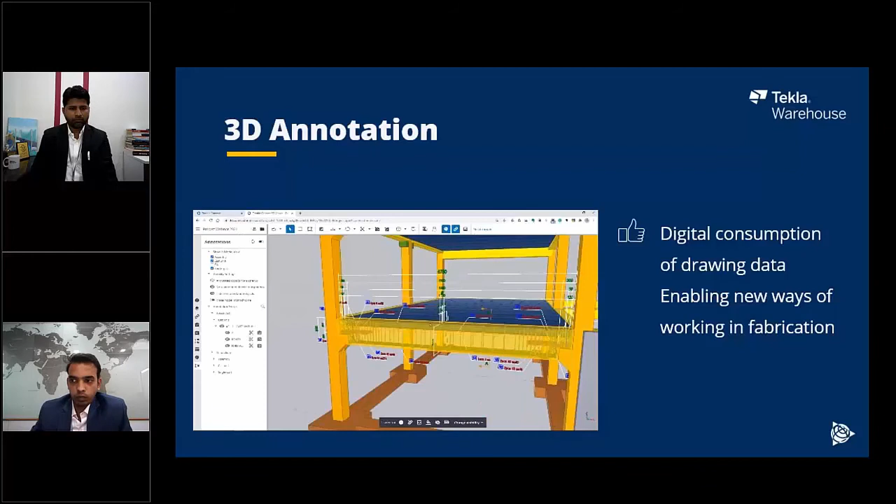We can share the workload at any given time. One user can work from a different location, maybe on the foundation level, another person can work on the drawings at the same time, and a third person can run the cost calculation at the same time. It's like multiple users can work in a single project.

And the power of this is we can get different versions of the model, and also we can work offline. It's not required to be connected all the time when you work. Once you join the model, you can work when you're flying or traveling, or from any location. And once your work is done, you just connect to the internet and sync it with the main model.

The main model is saved in the cloud. It's like Microsoft Azure cloud, which is more safe and secure. And also we have options to make your own server. Your server can be made in-house as well.

So this has huge benefits: less mistakes, powerful change management, higher quality documents and data, and the building data is transferred with less mistakes and more efficiently to project management solutions. So in summary: productivity, just-in-time delivery, collaboration and coordination, a lean method and effective waste reduction. So that's it from my side, guys.